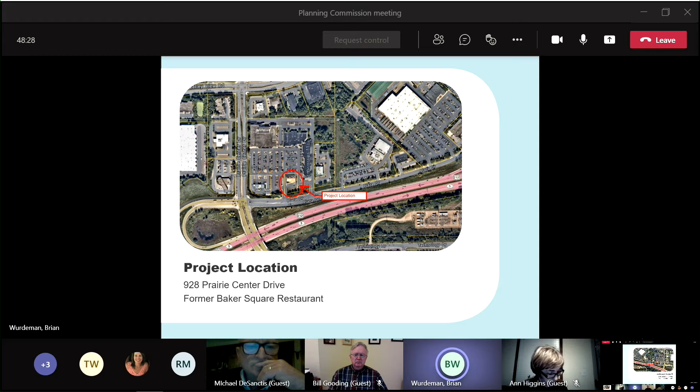Access will be provided via a shared private driveway, the existing private driveway off of Plaza Drive, which also allows access for the adjacent businesses in the area.

The project proposes 20 parking stalls. There's parking on the south side of the building as well as the north side, with 2 entrances into the bank branch, both the south and the north.

Currently, the north drive lane is a one-way circulated driveway. As part of the project, we're proposing to convert that to a 2-way 90-degree parking drive lane, so we will be doing some restriping of the existing one-way parking stalls on the adjacent property.

As part of the project, we will be providing enhanced pedestrian connection when compared to the existing Baker Square site. We'll be extending a sidewalk from Plaza Drive up through the parking lot that will allow for access into the bank branch. Additionally, there will be a pedestrian connection from the north side of the bank branch that would connect to a sidewalk adjacent to the Starbucks.

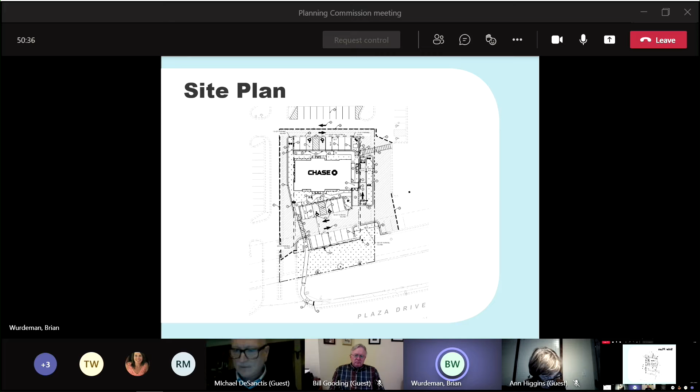That system, located underneath the southern parking lot, will collect stormwater runoff from both the proposed bank building and the parking lot. Water will be conveyed to that underground system where it will be stored and used for irrigation reuse, and it'll also be designed to provide the rate, quality, and quantity controls required by the city and watershed.

Once stormwater is managed and treated, it'll be discharged to the existing storm sewer within Plaza Drive.

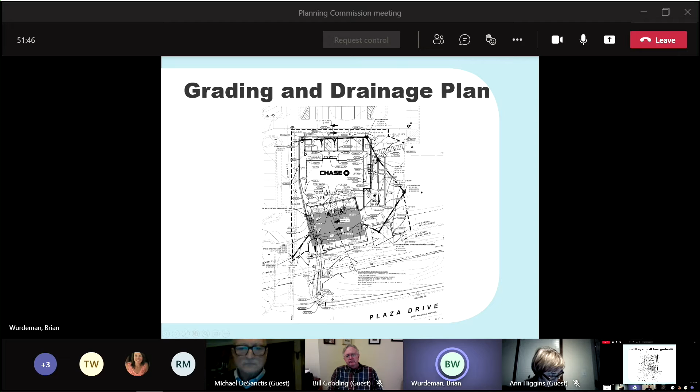On site, there is one significant tree which we will be removing, which we will be mitigating for, and there will be additional caliper inches added to this plan prior to the city council meeting, as discussed in the staff plan report.

The project is proposing a number of foundation plantings and plantings throughout the parking areas to increase the aesthetics for the site. All of these areas will be irrigated with the underground stormwater management system, as described previously.

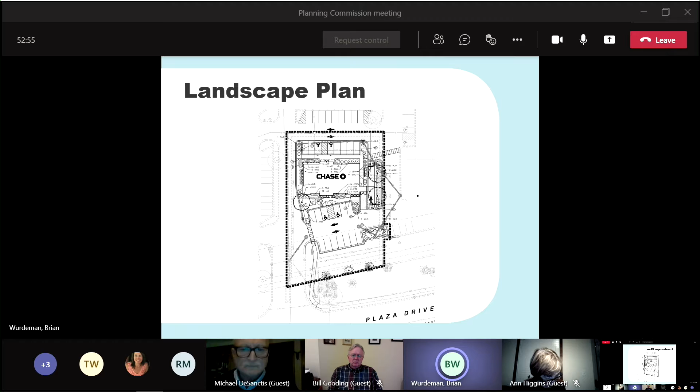With the redevelopment of the site, there's a number of sustainable items and practices being incorporated into the project. The first is the underground stormwater management system, which will have an irrigation reuse component and provide stormwater rate, quality, and quantity controls, which are not in place with the existing Baker Square site.

The on-site lighting will be replaced with LED lights and new fixtures throughout, and there will be improved pedestrian and bicycle connectivity and enhanced landscaping and improvements when compared to the existing condition. With that, I'm going to turn it over to Terron Wright to go through the building components.

Good evening, all. This is Terron Wright with the Architects Partnership. As Brian mentioned, we are the architect of record for the proposed Chase Bank.

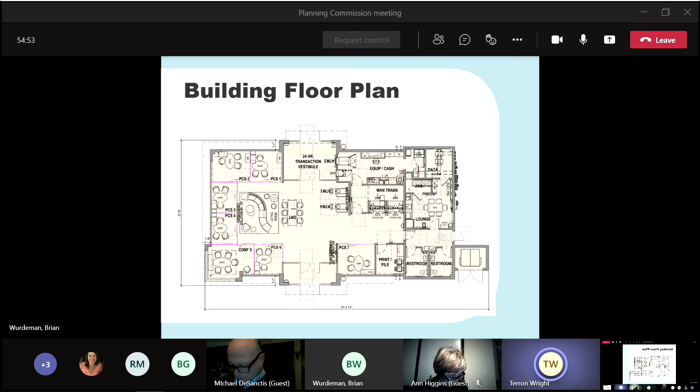For the building components, the exterior cladding is made up of Class 1 materials, basically brick and stone. We are seeking a waiver request for the aluminum composite panels on the south and west facades, which makes up a very small percentage of the proposed Class 2 material.

Overall, mechanical equipment will be screened. We are proposing a low roof, so mechanical equipment will not be visible from the street.

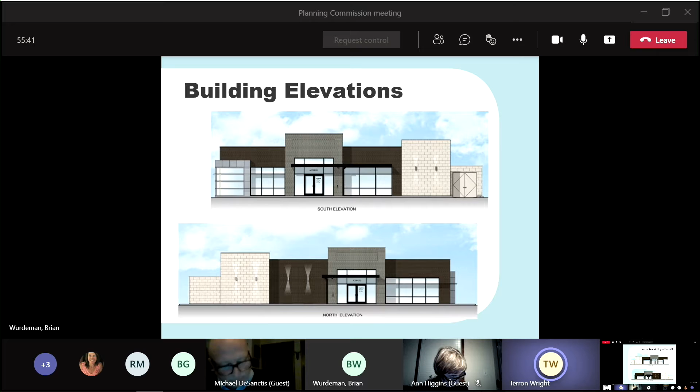In addition, we are proposing a single-story drive-up ATM canopy. It's an independent structure that will have signage branded onto it.

All electrical equipment will be attached to the east facade along with the attached trash enclosure. The intent is to screen that mechanical and electrical equipment from view with landscaping elements.

With that, I'll turn it back over to Brian. Teron?

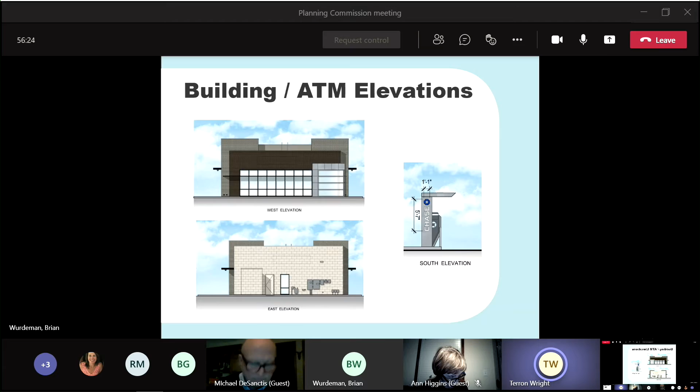And with that, I will turn it back over to Julie for the staff presentation. Okay, thank you, Mr. Wurdeman, and thank you, Mr. Wright. So commissioners, we have two people representing the applicant, the architect and the civil engineer.

Would any of the commissioners like to ask the applicant any questions about the project at this time? Commissioner Meddy.

I have a question for, I guess, the architect—it could be either—but are the doors on both the north and south intended for public access and open during business hours, or is one more of an employee entrance? Yes, there will be an open procedure door for employees, but overall, both doors will remain open throughout the business hours. Okay, thanks.

Any other commissioners wish to address the applicant at this time?

Mr. Commissioner, I have a question. Commissioner DeSanctis: the aluminum composite panels indicated in the memorandum that they were long-standing. Was that engineer certified? Are we looking at a 20-year life, 25-year life, 30-year life? Can you be more specific about the durability of the panels?